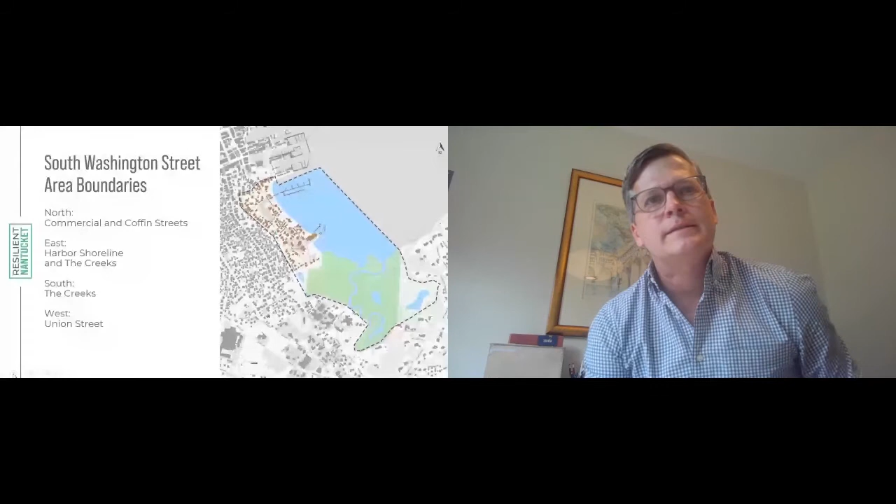In total, we surveyed about 180 buildings. It was just over 140 acres, close to 4,000 feet of shoreline. We used the property appraiser's value, minus the town pier and the Great Harbor Yacht Club, which sort of skewed those numbers. You can see the average, it was about 315 million, average price about 2 million per property.

You can also see property types. It was sort of an equal distribution from private and recreational governmental, and a number of different property owners, including the town and Great Harbor Yacht Club being two of the largest, and the land bank. Next slide.

In terms of resilience and adaptation areas, this was something the town identified as part of their coastal resilience plan. I think we'll hear more about this this afternoon, that's getting underway. So there were 12 larger areas that were identified. The entire town of Nantucket was identified as one of those areas. And what we were suggesting were sub areas, like the Washington Street area, for example, or Brant Point, as being different from one another. Next slide.

And we looked at an amazing amount of policies and guidelines. Thanks to Kim Rose, the Acclimate coordinator, she helped prepare our summary of all of the different standards and guidelines and ordinances that impacted our work. It was over 50 pages. So there was a lot. I'm not saying we looked at everything, but we did our best to see how what we were going to propose aligns with current policy. Next slide.

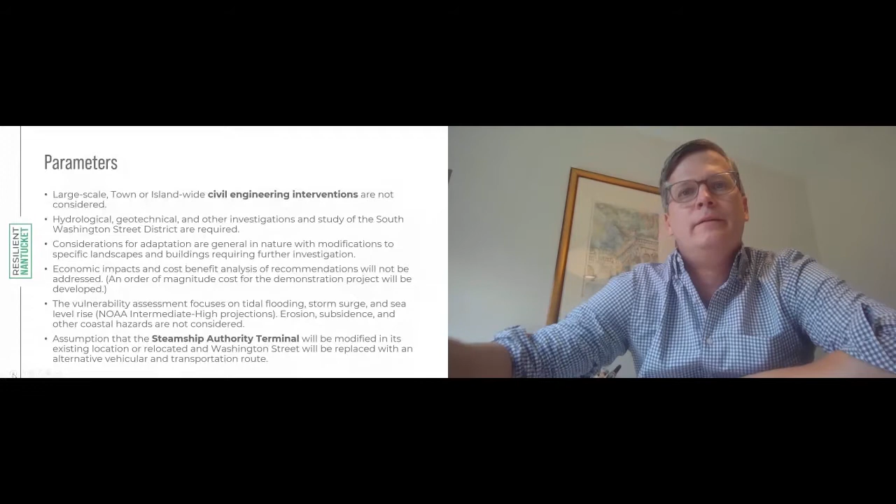We also had to make some assumptions to help frame our work. A couple of things I wanted to bring to your attention: one is that we weren't going to be looking at any large civil engineering interventions, but rather taking a nature-based approach to adaptation and resilience. The other assumption was that we weren't really talking about the relocation of the steamship, which is going to be important in terms of impacting vehicular transportation through the town. So those were two things.

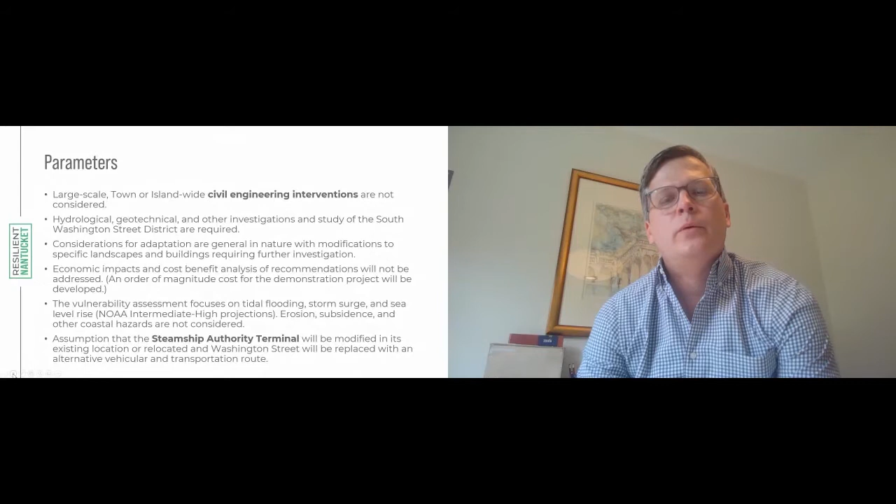But if you go to the next slide, you'll see we did actually look rather closely at how people move through our area. As you're all aware, Washington Street is a core vehicular and transportation route from the steamship to Mid-Island. If we go to the next slide.

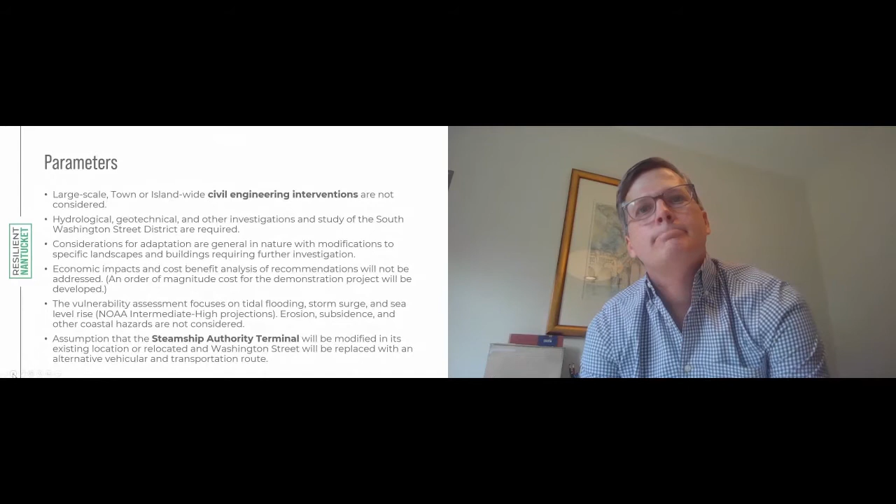We looked at about 6 different time periods. These are a bit arbitrary, but they were major milestones or major events, such as the fire in 1846, for example. It kind of ended the whaling era, and then looking at redevelopment after the World War. We go to the next slide.

We did a series trying to understand how the urban pattern changed and when streets appeared, moving from left to right as the area was developed. There was moderate development. Union Street appeared, and that was residential. It remains residential. And there was some industrial related to the waterfront and fishing. It remained that way. The train came through there in the late 19th, early 20th century. And then you see it as it is today on the right. If we go to the next slide.

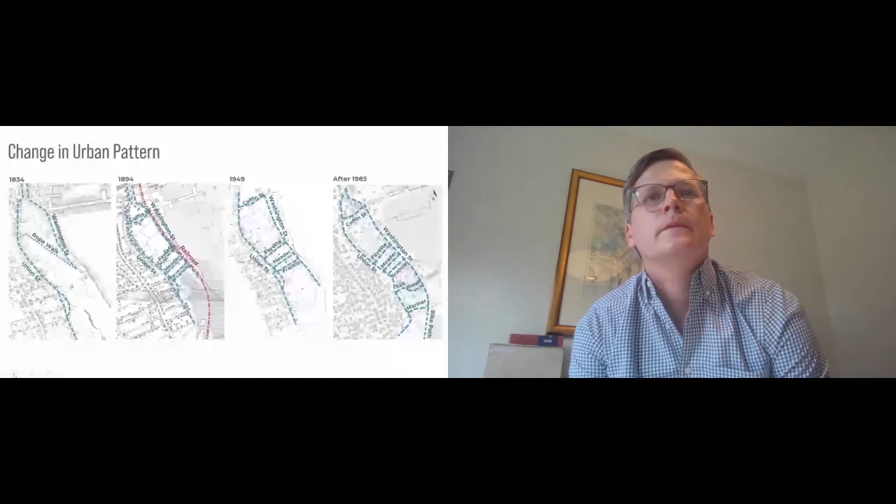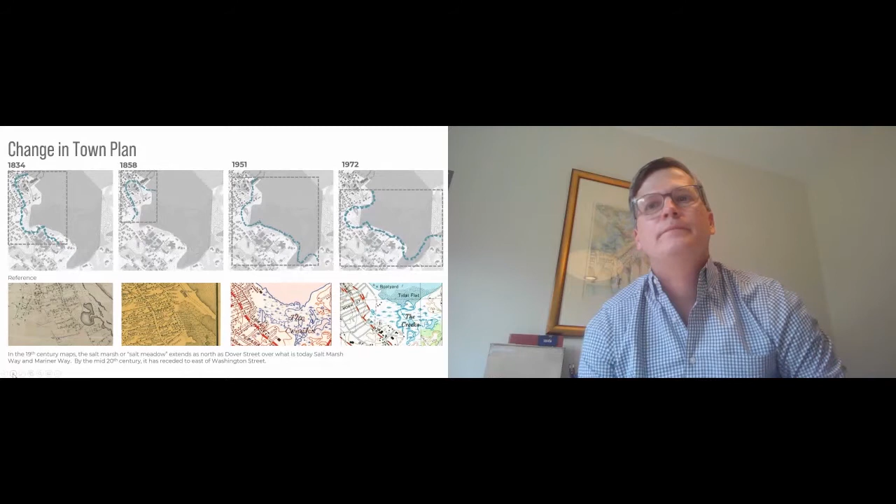With this, we looked really closely at the maps. We were fortunate to have a lot of maps over time, looking at the limits, if you will, or boundaries of where the creeks once existed and where they exist today. So that's what this is looking at. Next.

And then we began to map, as part of these different periods, when buildings began to appear and buildings went away. The one thing I want to say, and we'll go through these quickly, is that a lot of buildings have been removed over time in this area. With the exception of maybe Union Street, it's not a cohesive neighborhood based on one period, but it really is layers of different periods of history represented in the built environment. So if we move forward, you can see, we can keep going.

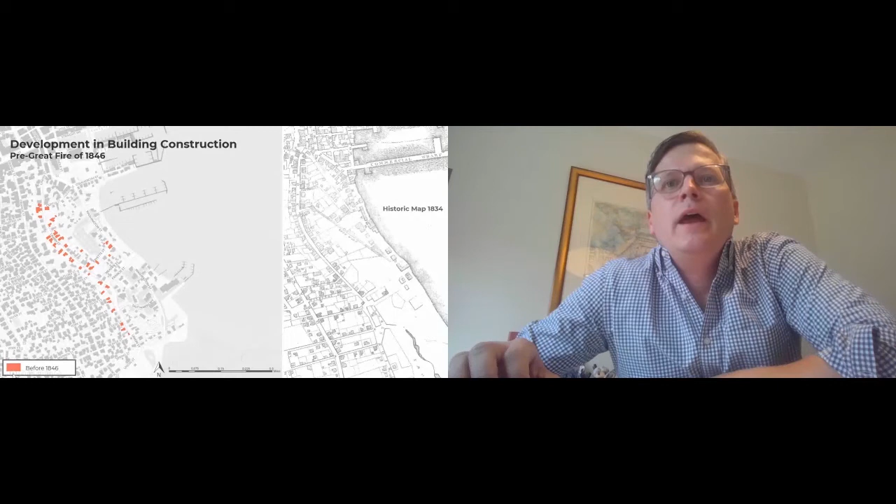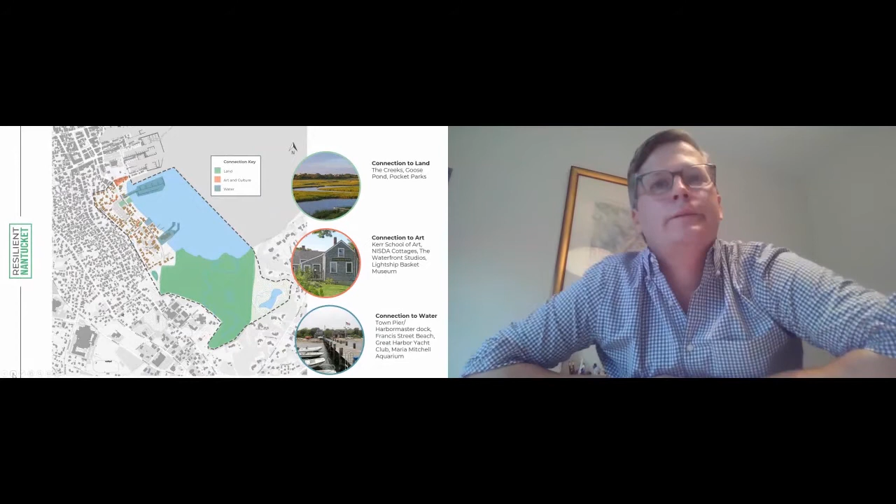Next slide. And we just identified the idea of guiding concepts: connection to land, connection to art, and connection to water. Next slide. So really quickly, we'll go through built environment. We used a GIS-based app on our phones to collect data, and you can see some of the survey categories. A lot of different data was gathered on the 180 buildings.

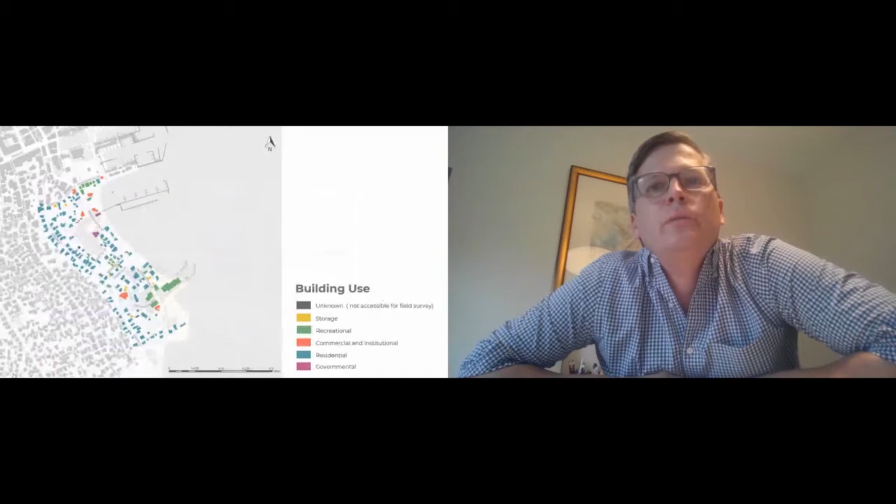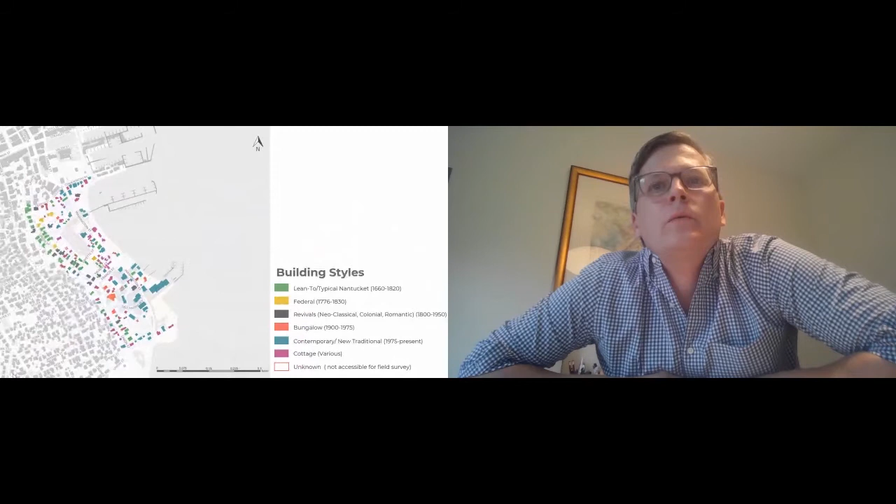We looked at building use. If you go to the next slide, the majority of it's residential, but again, it's a mix. We looked at building styles, usually associated with specific moments in time or periods. If you go to the next slide. We also looked really closely at structural systems and foundations. If you're going to talk about adaptation measures, this is really important.

Next slide. And then also building condition, very simple: good, fair, poor. But again, if you're going to be talking about making these structures more resilient, their condition is going to be an important aspect of what's possible. We keep going, next slide.

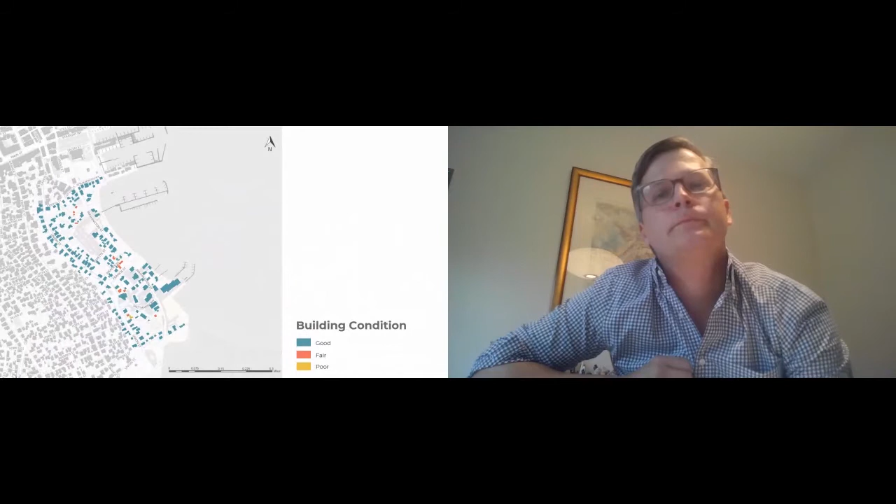Then, if we go by street, go to the next slide, we looked at each street and the character of the 2 main streets, Union and Washington, Union being colonial era, but also late 19th, early 20th century. Coffin Street was one of the cross streets in the area. It's really mixed, and so is Fayette, a couple of historic buildings, a little more recent buildings. If we keep going to the next slide.

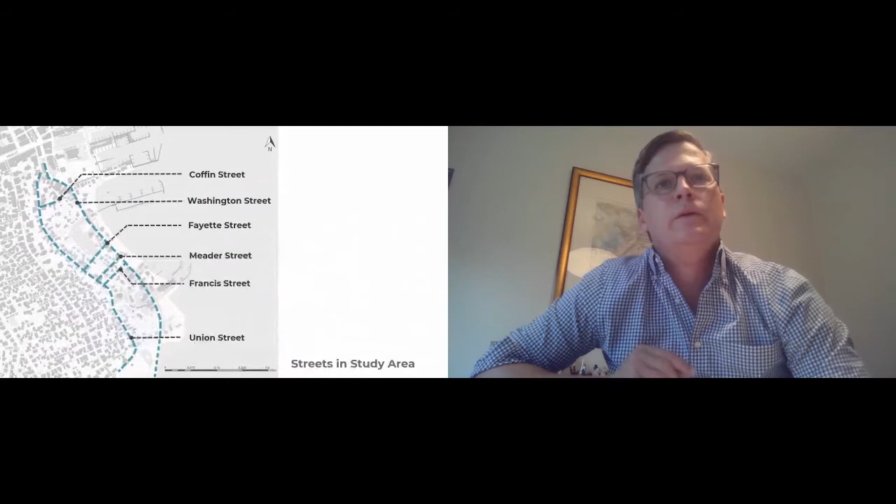Same with Meader Street. It's a lot of these summer cottages. And then Francis Street also has a mix, from the NISDA cottages to other summer cottages or residences. And then lastly, Washington Street, which again is fairly diverse in terms of the built environment. We keep going. The natural environment, similar survey methodology.

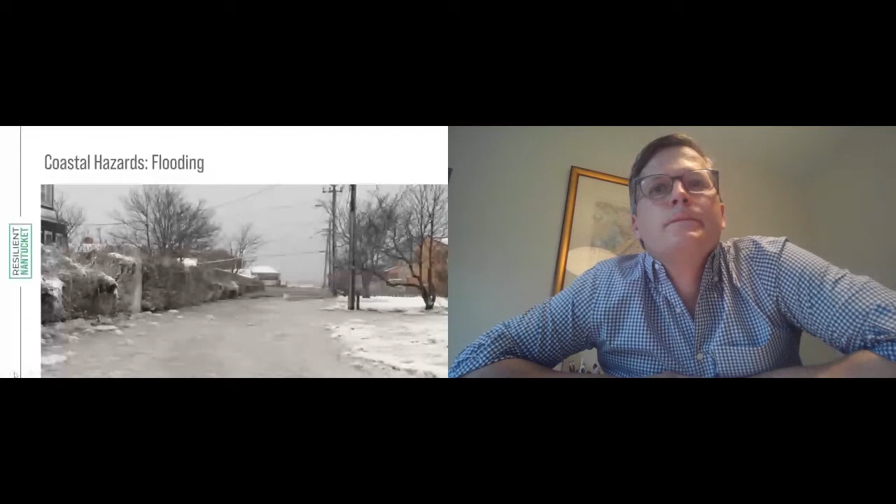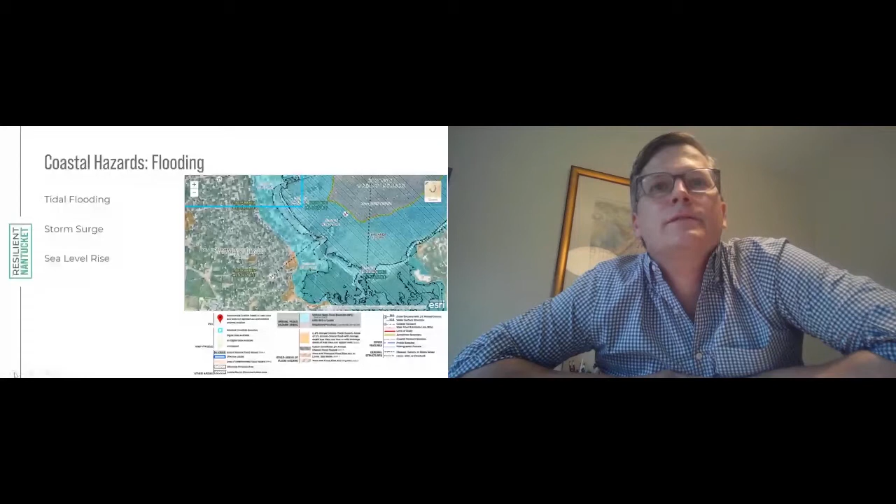Again, we looked at tidal flooding, storm surge, and sea level rise. I'm going to focus a little bit more on the sea level rise scenarios today. This is a FEMA map. Keep going, next slide. Thanks to Chuck Larson, this is a slide with information he provided looking at tidal flooding on Nantucket. We're fortunate to have a tidal gauge. It's been in place since the early 60s there in the harbor, maintained by NOAA. Next slide.

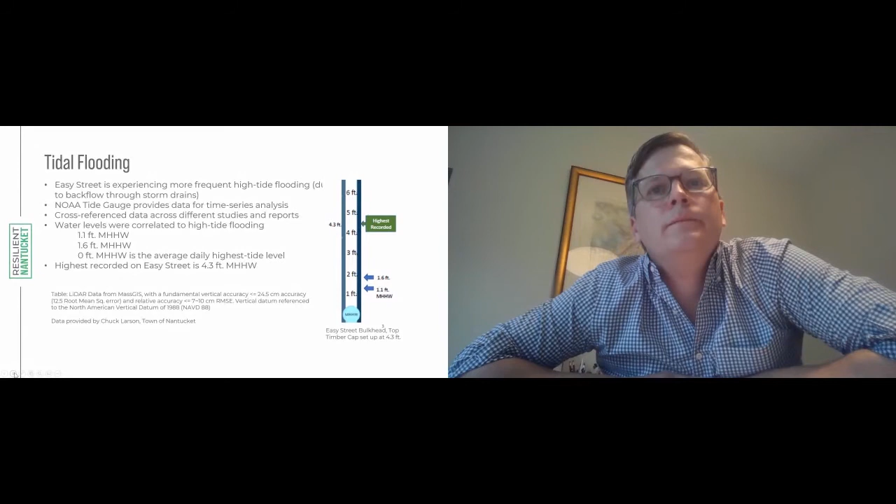And you can see of the 10 worst flooding events on record in Nantucket, 7 since 2013. The 2018 storm being the second worst on record. I'm going to zoom in on the developed area of our study area, and the projections that we use for sea level rise were the NOAA intermediate high, which is what we used to do the modeling and visualizations during the first phase of Resilient Nantucket. And what you're seeing here is the expansion of the creeks over time from 2030, 2060 to 2100. Next slide.

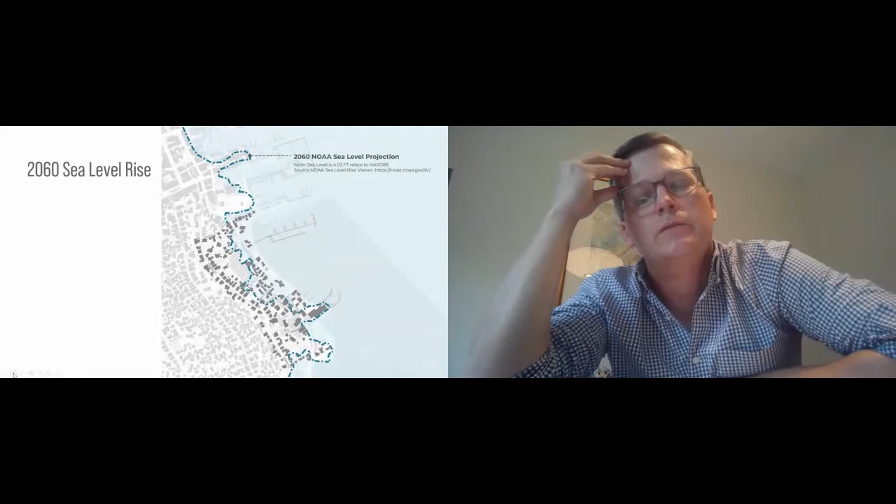We chose 2060 because we looked really closely at the data, and somewhere between 2050 and 2060 is what we feel is the real tipping point where a large amount of the study area becomes inundated. And it's between 2050 and 2060, at least at these intermediate high projections, that Washington Street is then completely underwater. Next slide.

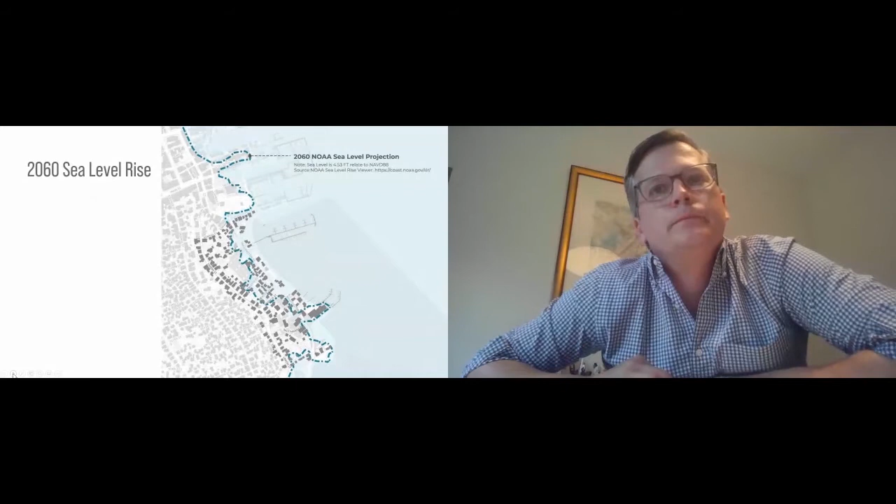And then by 2100, you have water up to Union Street. There's that distinct elevation change there, a cliff, if you will, between Union and Orange. But my caveat here with this two-dimensional map is that you've got water at Union, but it doesn't necessarily mean that water's in the first floor of houses. You may have water in basements or foundations, but it's not quite to the level where it's inundating first floors at this moment. Next slide.

So in terms of resilience, there are three broad categories: protect, accommodate, or retreat. If we go to the next slide. Protection could be things like hard barriers or civil engineering projects. On the top is the MOSE project in Venice, the gates that are activated when there's storm surge coming from the Adriatic into the lagoon. And then we heard from Aaron Minigan from Charleston that they're proposing up to a 12-foot seawall. These are renderings of what that might look like. Next slide.

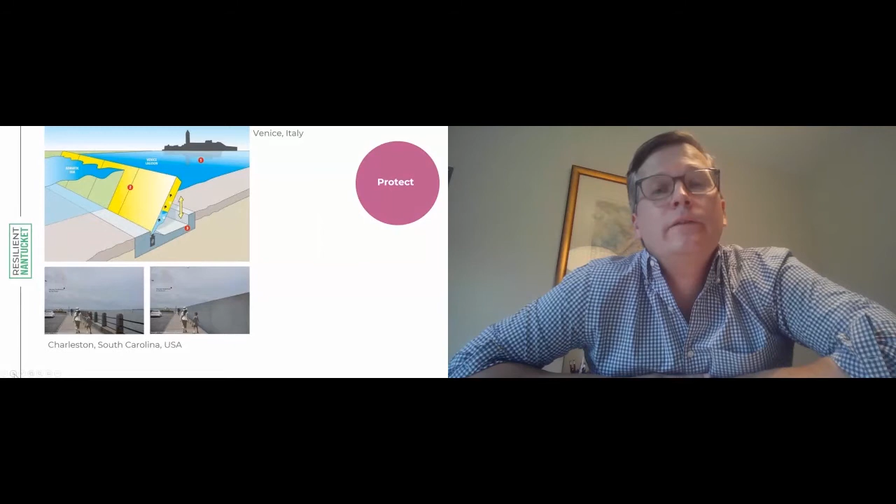And in terms of accommodate, when it comes to the built environment, there are three broad categories: dry flood proofing, trying to keep the water out; wet flood proofing, which is allowing water to access the building, but in a way where the building can be recovered more quickly; and then of course elevating, and that's already occurring in the study area. This is one of the older structures along Washington Street that was elevated about 4 years ago. It's a little over 4 feet off the ground. There was also an addition done, but this is happening. It's just happening more on a property by property, more myopic kind of way. Next slide.

And then this is a proposal for 92 Washington Street, which has been approved, and they're using that 9-foot FEMA recommended elevation. This property is right next door to the Great Harbor Yacht Club. So it's just a way of saying that this is already happening, that changes are being made that are going to impact the character of the individual areas or neighborhoods of Nantucket. And I think we really felt strongly that we should be looking at this at a neighborhood scale and having guidelines for elevating and wet proofing. Next slide.

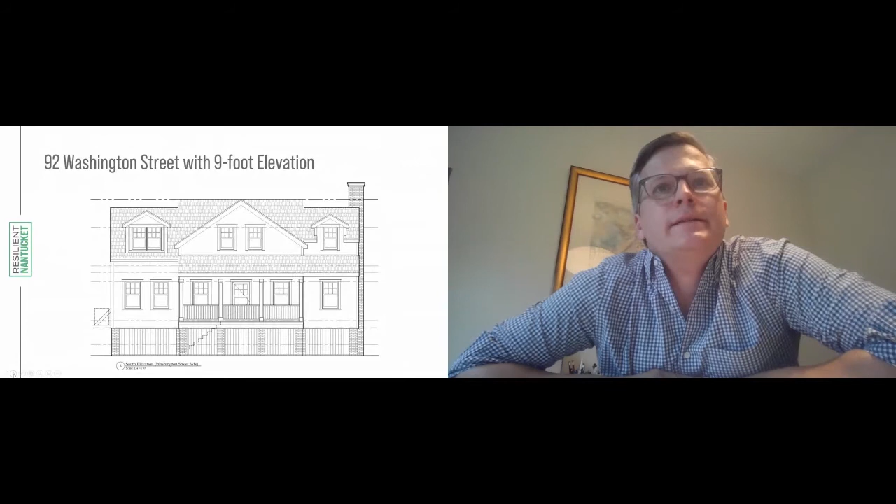And then there's retreat. We've already seen the relocation of the Sankaty Lighthouse, and we, of course, had a famous case of a rather large residence last summer that was moved back from the coast. Next slide.

Thanks to Bob Miklos, our partner in this effort, he came up with this idea of the linear system. So what you're looking at here is as water begins to move into the area, we're talking about a different treatment for each of these linear systems. The first is the idea of introducing a living shoreline. Right now it's just conceptual. That can mean many different things. I'll come back to that. How we might modify the existing harbor shoreline, including berms and different types of plantings and drainage. Then we've got Washington to Union Street, looking at what can be done with the buildings again, and also controlling water. And then lastly, we have the Union Street linear system. Next slide.

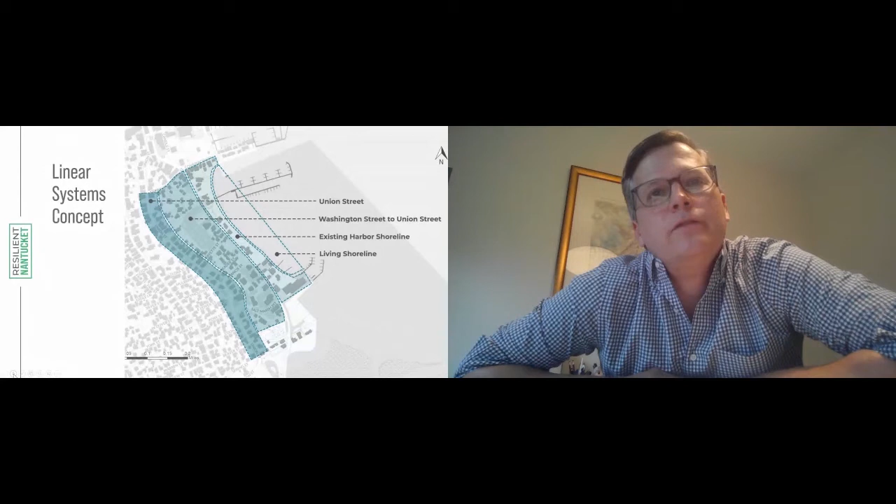And if we look closely, we can keep going, Rita. In November of this year, the Park Service issued their flood adaptation guidelines for historic buildings, and we followed those pretty closely, but now are in the process of really adapting them to the specific needs of Nantucket. If you go to the next slide.

So interestingly enough, what we're proposing is rather than just strictly looking at one strategy, it's a combination of strategies where it would be elevating and maybe wet proofing. Right now, the town, in terms of its hazard mitigation plan, is not really recommending the wet proofing of private properties, but we think this is something that might need to be revisited. Next slide.

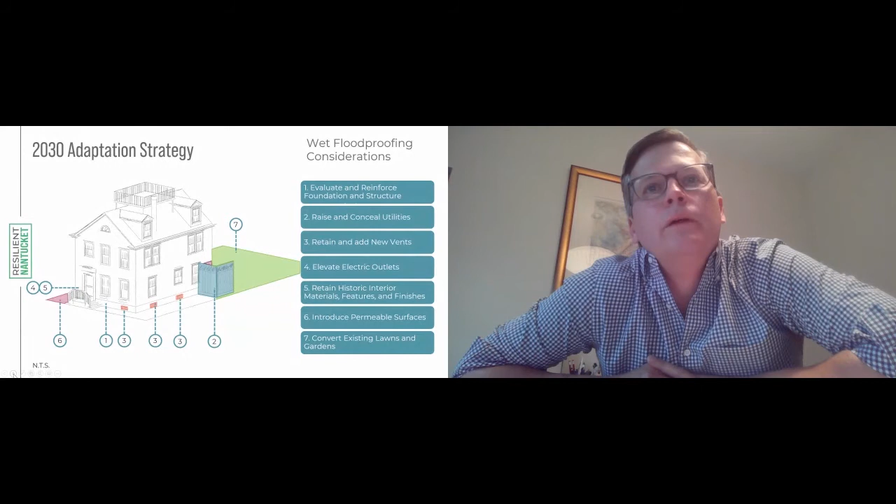If we keep going to the next slide, those are more wet proofing, but by 2060 in this linear zone, we're talking about elevating the structure, and we're still continuing this work on what the details of that might look like, what the foundation should look like, and how to mitigate that kind of pretty marked change in the built environment. If we go to the next slide.

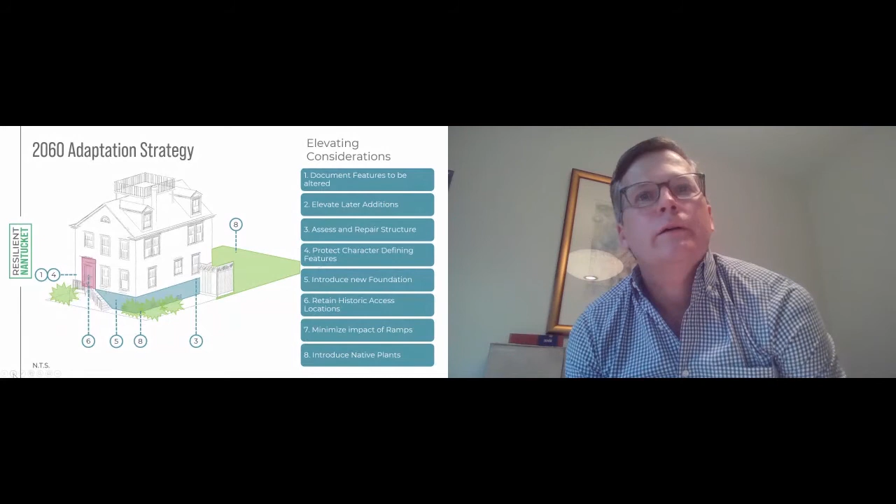And then 30 Union we took a look at. We can go to the next slide. This is the last linear zone to be inundated with sea level rise. So again, longer time frame here, we're talking about more like 40 years to introduce some of those same ideas of venting and changes to landscape. If we go though to the next slide, we then would be looking at elevating this property as well. If we keep going, Rita. If we just go to the next slide, please.

And the other thing that we put out there is the idea of a uniform height, where as buildings are raised or as property owners make that decision or new buildings are constructed, there's a uniform first floor height. So again, rather than each property building off of the ground 9 feet, the idea that the first floors would all be in alignment. So toward Union Street at Francis, you would have buildings being raised not as high off the ground, maybe something more like 3 feet, whereas as you move toward the water, you are talking about buildings being as high as 8 feet off the ground. If we just go through the next few slides, Rita, just to show, this is a concept, again, we're still finalizing the idea here.

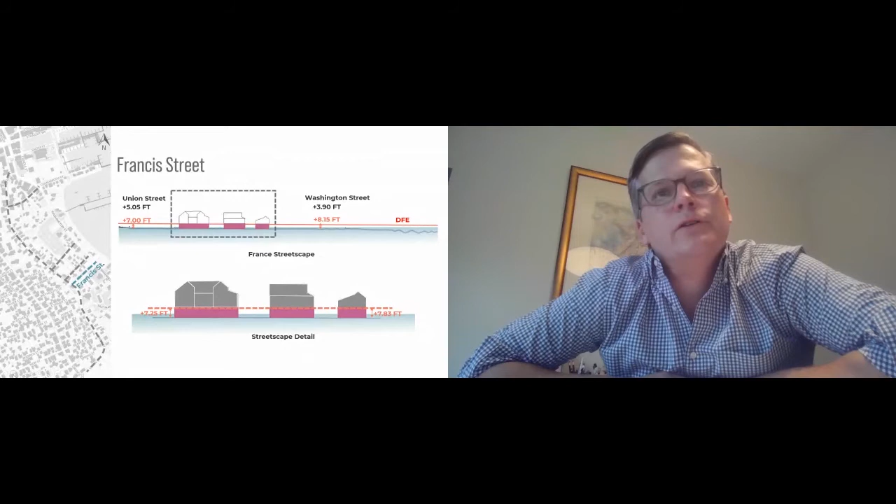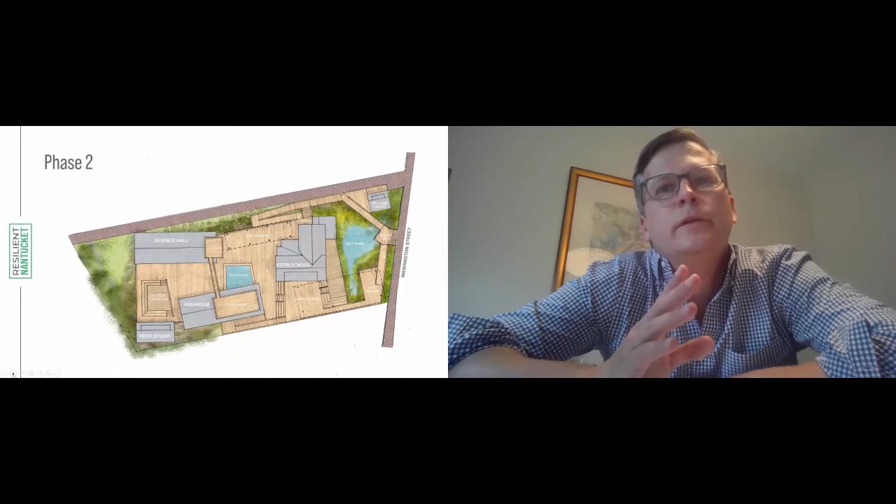And ultimately, and we're not talking about in the next 10 years, but maybe by 2060, the parking lot will be going away as the area is slowly inundated with water. So the idea is that it could be what we call a cultural and workforce village that could be constructed there in the parking lot. So we really were trying to look at this as not only a doomsday scenario, but that there may be opportunities for different types of development, that you're not abandoning this area. We weren't talking about managed retreat, but we were talking about managed change. You go to the next slide.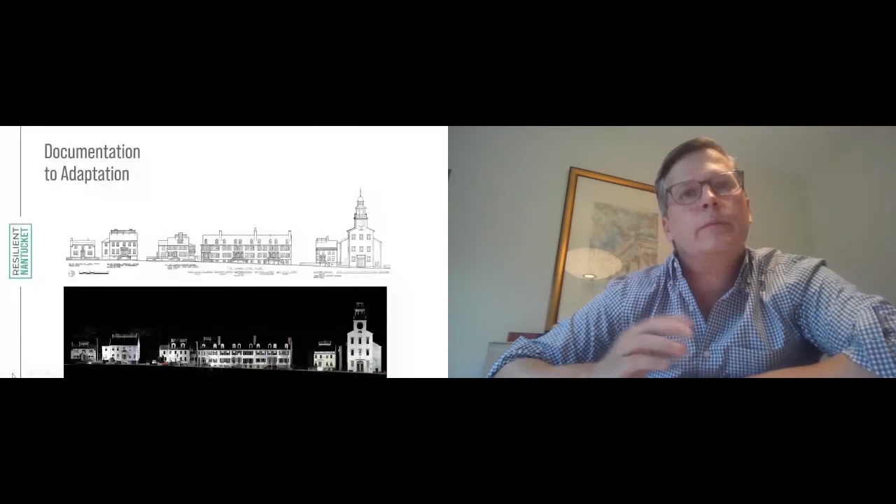And then I just wanted to end by saying, I think that Nantucket is an incredibly innovative and creative place and has been resilient for hundreds of years. The residents and visitors in Nantucket have been living with water and natural events like hurricanes and nor'easters. And so seeing the Dreamland floated, I think it was floated twice actually across the harbor. I think that together we're going to find a way to move forward. And I think that's going to conclude my talk.

Great. Thank you so much. I'm sorry for the technical difficulties, but I think I kept it pretty quick.